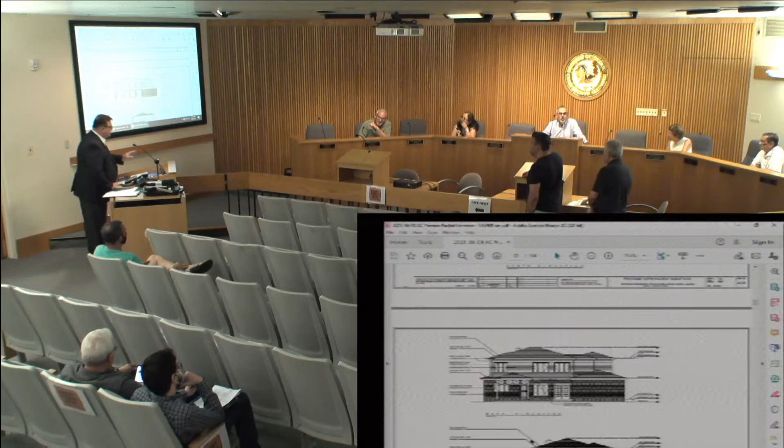Joe, do you have thoughts on those? Is your mic on? I do, but I was talking away from the mic, so I'm sorry. Okay, thoughts on the commissioner's comment?

I mean, it's valid. These look a little bit more complementary of the elevation. The two windows you see on the right are from the master bedroom. The one on the left is from the master bath, which has a bathtub next to it. That's why they're bigger, and the room is bigger. The room is about 17 by 19. So we went with the code just to satisfy light and ventilation requirements.

So you're saying based on the size of the rooms, a larger window might overwhelm it? Yes. Okay. Joe, are you good with that response? Why don't you make a motion? Thanks, Joe.

As the new guy, I have to make a motion. I will make a motion to... you know, I'd rather not. I'm gonna hold on. That's fine. Does anyone else want to make a motion?

Jay, you had some comments, why don't you move? I don't have any comment on that, but I can make the motion. Please do.

I'll make a motion that a certificate of appropriateness be granted for case number 2021-033A, 8018 Lauren, as presented. Anyone second? I'll second. All in favor? Aye. Any opposed? No opposed. So passed. Thank you very much. Good luck. Thank you.

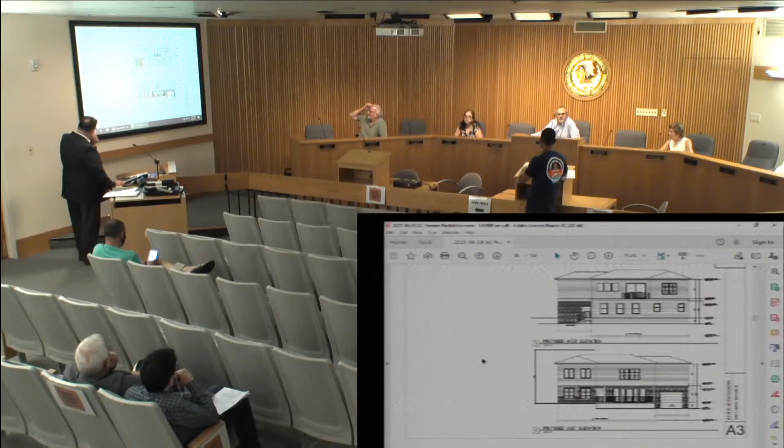And the brick? The brick is gonna stay as is, it's yellow, just as the home is now. And the roof is? The roof is currently asphalt. And it's going to be a standing seam? Yes, standing seam roof. Do you have existing pictures? I've submitted them. I saw them online, actually.

Is there more? Okay, this... This is the rear? Yes. And that's the side. All right, so the yellowish brick with a gray Hardie plank above and a light blue standing seam roof atop that. All right, it's a neighbor. This is my neighbor's house, yes.

Across the street neighbors, they don't... all right. Well, I think we've resolved that, that works for me. Any other comments?

Mary Jane, it doesn't seem to me like the windows—if you could show the front facade of the house, the proposed... the windows, I don't understand why they're different. Upstairs, on the left side, they're not divided like the ones below. Yeah, that's just a design.

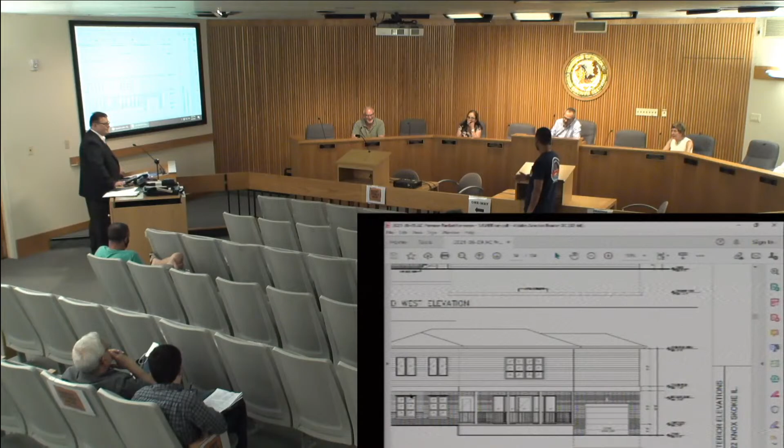Moving on, case number 2021-036A, 8118 Knox. The staff has no objections with the design. However, it is recommended that additional brick be provided to ensure 51% masonry coverage, and the new windows on the east elevation match the size of the existing windows. Technical items to be addressed include ensuring all building code requirements are met between the addition and the detached garage, and the installation of a sprinkler system. Also, a pin consolidation is required. I understand there are some comments as well from concerned neighbors for this case.

Is that true? It's the Davis one that I mentioned. Never mind, I misspoke. What name? I'm just kidding. Go right ahead, sorry.

Our architect has said that we're actually at 55% masonry, according to his notes, because we asked him after we saw the staff recommendation. The other thing is, our house was built in 1939, so finding brick to match is gonna be costly and probably impossible. We do have the siding, which is a very good match to our brick - I have a sample of that. Do I pass that here? You could just hold it up. Got it, looks good.

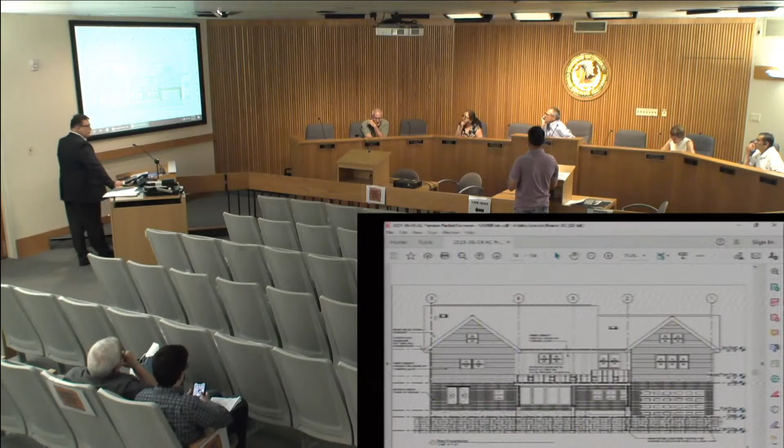My garage is set 13 feet back right now. I'm gonna bring it up to the sight line with the rest of the houses. Bringing that up, what it'll do is - you can see in between what would be the north side of the house and the south side of the house - we're gonna create a covered patio with a steel roof, kind of like an accent roof. So it'll be a black steel roof. The roof on the house itself will be a black asphalt roof.

I brought samples of what we're planning on using. It's gonna be a Trex deck and white wrapped column posts.

As far as the windows on this elevation, I have a mess up, I guess. I didn't notice that my architect didn't put it in, but the 2 windows on the north side of the house we're currently looking at are going to be the same size as the 3 windows on the south side. It won't be perfectly balanced, but that room's a little narrower.

And then on top, I agree we should do 1 and 1. The 1 window on the north side is gonna be just a window in the attic. On the south side will be a single unit with vaulted ceilings - that's where my master bedroom will be, kind of in between the two.

So if we go from south to north, the 2 larger windows are our master bath, and the next 2 preceding windows will be a 2nd-story laundry. The size of the big windows is 32 by 54, and I'm trying to keep the smaller ones symmetrical with whatever is built into the brick of our house currently, which is a 36 by 38 window.

So basically on any of the other elevations you look at, on the first story, all the windows match the same as what's currently there. I'm sorry, Carl, is it?

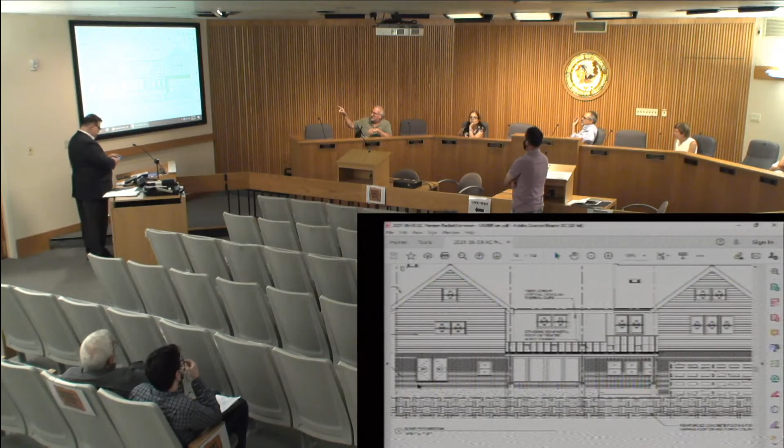You had mentioned something about the gable windows - those were gonna change a little bit, because your master bedroom has a vaulted ceiling. They were only gonna be singles, a single and a single. So instead of two above the three, they'll have one there and then one on the other side. Correct, okay.

And then the other thing we're tossing around is, from peak to peak, you know how they put that trim board, and then putting a different, like a shingled kind of look, James Hardie look. So you'll have the vertical, and then you'll have like an accent. I have a brochure if you want. Please - is that in the packet? No.

There's been no public comment on any of these items so far.

Thank you. So see how - I don't know if you want to pass this around - see how they go vertical, and then it looks kind of like roofing, I guess, it's just decoration. It's to break up, so not everything is symmetrically flat.

Yeah, I like the way you used the vertical board and batten in the center, or vertical siding in the center. So it'll be nice, like three things - you have the vertical, the board and batten, and then the new thing nowadays is it looks kind of like roofing, but it's not roofing. If you look where the single window is, right there, if you look into it, it's not actually just vertical siding - it has a slight accent of something different. I believe you, so it's got a texture.

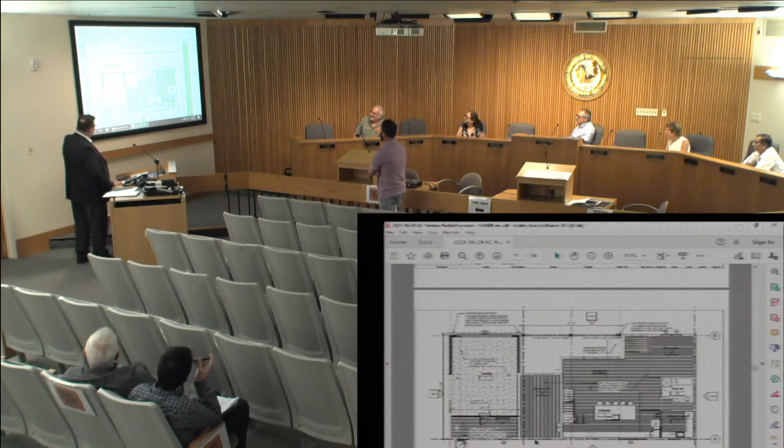I'm going to get up. Right here, so you can get this up. Because I'm assuming you've got a small patch of grass between your house and the alley on that side. Is that where, or am I wrong? Actually, it's not giant, but yeah.

Yeah, I mean, and it's just again, I don't want to start an argument or anything like that. This was just a comment, something for you to consider and think about.

We actually have, from the north side of the house, the east end of the house, a paved walk, and there's an air conditioning unit. I barbecue in my little patch and I wish I had a door to the back. Okay, gotcha, that's all I'm saying, just keep an eye on it.

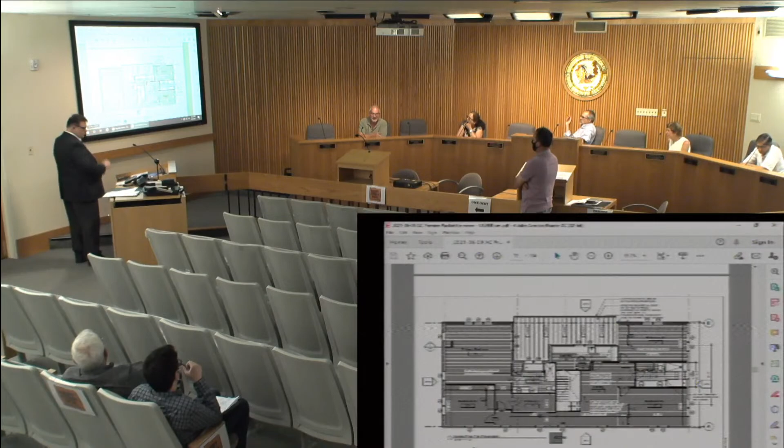You said you've got kids, it's probably a good idea to have a spot on the side to get to the backyard. Because when you barbecue in that little space, if there's not a lot of air, I have to be careful of my neighbors. So just a heads up. I got cool neighbors, Terry O'Lean is my neighbor, I'm sure.

All right, well, whether we can give you an option for the door, in the motion. Does anybody feel up to it? All right, good, because I want to do it. I move that, no comments, right?

I move that a certificate of appropriateness be granted in case number 2021-036A at 8225, along with the following provisions: Matt, if you could go to the elevations for me please, the other way. The front, that's good. That the north windows of the west elevation, on the left, on the second floor, be increased in size to be consistent with the 3 windows on the south side of the west elevation, and that only 1 attic window per gable be used instead of two, thus eliminating 1 on the south side of the west elevation. That's it on that elevation.

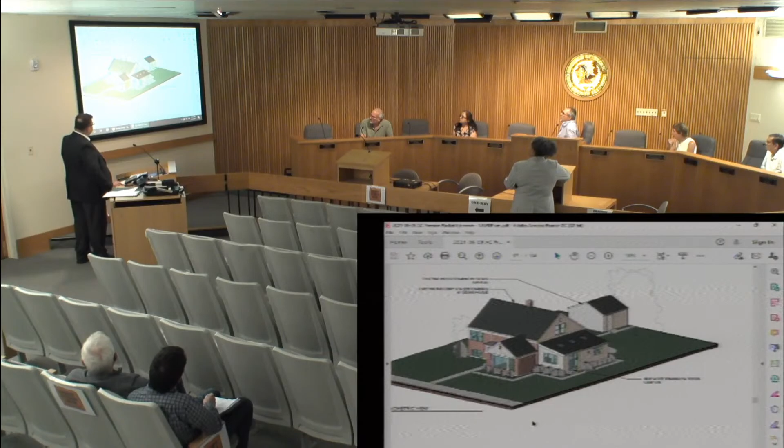I understand the comments of the staff. I'm opposed to the shed roof. You have a house and a garage and a porch in the front - I don't know if that's the garage or anything - they're all gabled, and now the addition looks to me like an addition, not picking up the architectural features of the existing house. I understand the need for more space and how challenging that can be, but go back to that elevation right there, stop.

That kind of is screaming at me that the slope of the shed is not consistent with the slope of that gable in the front, and it's not pleasing to me. I don't know if that can be redesigned to meet your space needs, but to me it looks like it's just been slapped on the side of the building.

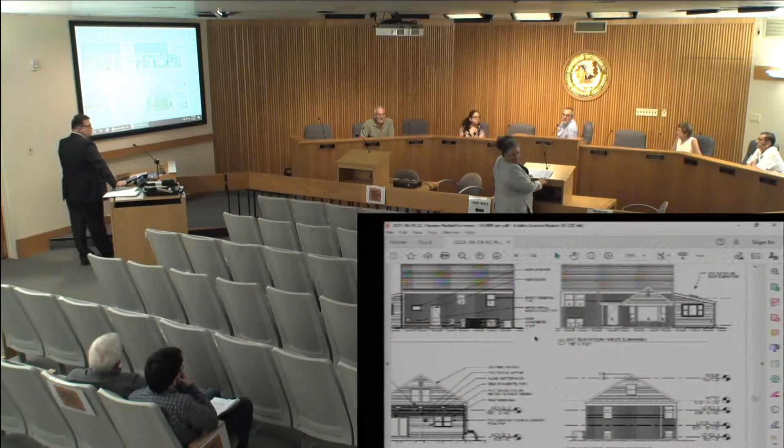So this is our friend the architect, Chris, who is working on the project with us. Hi. For the record, my name is Chris. My husband and I are the architects of the project.

Several months ago, when we started the project, we did several roof-type studies for the addition. Understanding that the program was specific for the first floor, we did explore alternate ways of doing a roof other than shed, that would not impact the second floor, including that window up above. So I can share with you some of these renderings if you'd like to see what we were looking at in terms of a gable structure.

Well, before you do that, would you be willing to move in that direction? Well, I may not want to present them if you're not. I mean, it's not our preference. That's not what we want to do. But if it means that we have to do that, or nothing, we're open to it. But that's not what we budgeted for.

It's not our preference, so, but if it's a requirement... Well, we're not here to require anything. We're here to look at the appearance. These are our comments. There will be a vote, as you've seen all night long. If the vote fails, then you'll have to redesign anyway. I don't know if you're gauging the temperature of the commission right now on the submission. You've heard my comments, and that's about it.

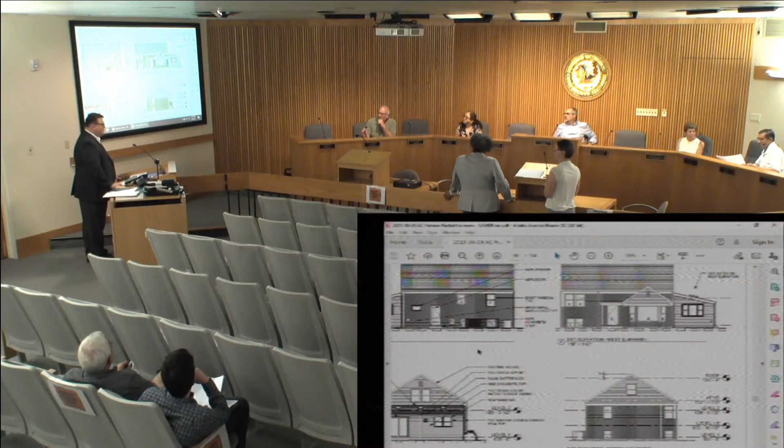I had training for about 15 minutes 18 months ago on how to do this, and then COVID hit. Right, exactly.

In the interest of, as this is going around, I do have a couple of comments as well, and I agree with the comments of staff and fellow commissioners. There's a couple of things going on that may be able to be resolved. One is that it's hard to see that the addition is recessed a little bit. There may be a way of, the roof line, I think, is what everyone's really kind of focused on, because it doesn't follow the roof line of the gable of your living room and the gable of the house. They're all proportionate. There may be a way you can take a look at it by maybe creating an outdoor space in the front, and then maybe a pergola or something that comes across that creates a flat line, so that when you pass the house and you're looking at it, you're not looking at that kind of shed addition.

The point is to make it not look like an addition, or if it is an addition, make it really stand out, like do a Nichiha panel or something, make it red, go crazy with it. You would vote for that? I would, but if you're gonna go different like that, sure, and that's expensive, but if you're gonna go that different, sometimes it's better to just go different instead of trying to make it look like an addition.

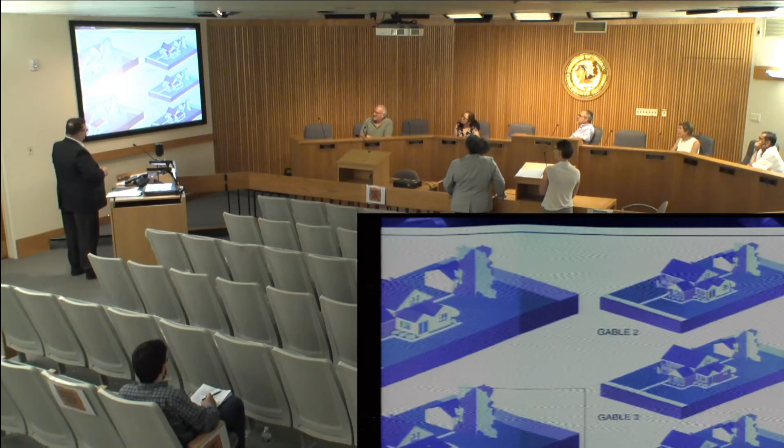So the one on the bottom left, which is not fully on screen right now, is the one that we have presented to you. And then up above it would be with siding on the outside and the double gable.

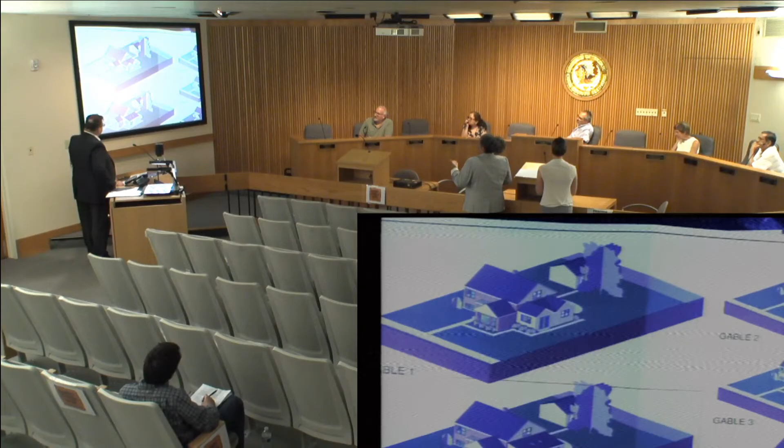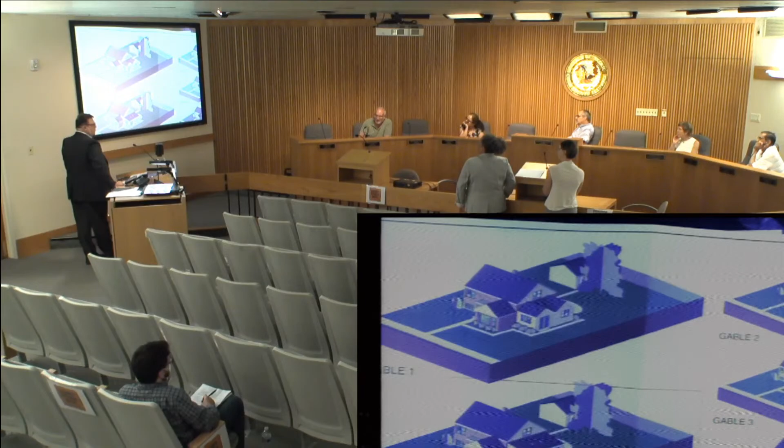I think the part that bothered all of us were those two peaks that poke up above the transition line, matching the shed pitch roof. We just preferred not having those two little bits—it just didn't sit right. Is there a solution to that, Joe?

Well, somebody mentioned earlier, did you consider a flat roof? You might be able to go with a second floor deck eventually, like a phase 2 in 10 years.

I see what you're doing with this shed roof, meeting that transition line and coming down, probably creating a little bit of vault space in the kitchen, which is nice. But you could also go a little higher with a flat roof and get that vault space, keep the window facing south in the master bedroom, and then for phase 2, when you want to retire in Skokie in 20 years and stay put, you can always have a way of expanding further.

So, it's something to consider, because I think that would resolve the odd angle of that shed roof, and it's not adding a big expense—plus you're not adding all of the extra gables and little peaks going above that transition line. I think it would resolve the issue that we have.

And maybe you can use the flat roof if—I don't know what the function of the second floor is there. It's the primary bedroom. You can open it up and have like a rooftop. Yeah, that's what Joe was suggesting.

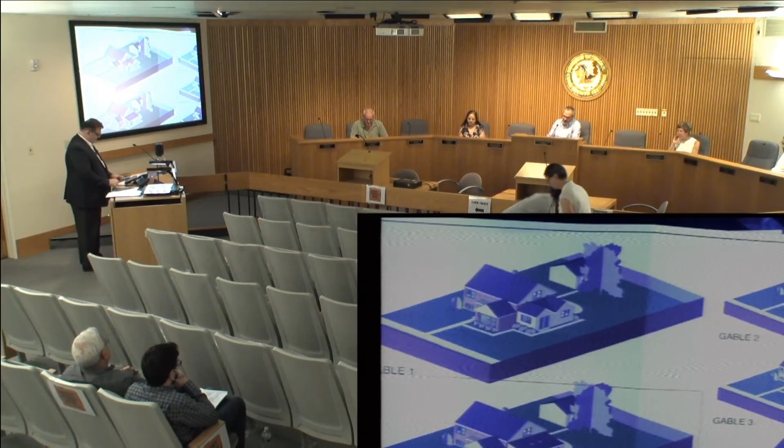Okay, moving on. The next case is case number 2021-037A at 8253 Kimball for Howard Dardick, an industrial first floor addition.

Hello there, how you doing? Good, good. Might want to just give us a minute. Oh, and the comments are: staff has no objections with the design. Technical items include a zoning board of appeals approval on Wednesday, July 7th. Correct. Okay.

This is your property? Yeah, it's at 9 feet to the back of the property approximately, which will line up with the building to the north that we also own. We own the buildings on either side of it. It'll line up on the north, and halfway more on the south, because both of those buildings come out further than this particular building. They'll have a larger garage door at the front. If you look at it, the far building is approximately where we want to come out to. We'll have a larger garage door, which will make it easier to get in and out, and that's basically what we're doing—we're adding 9 feet.

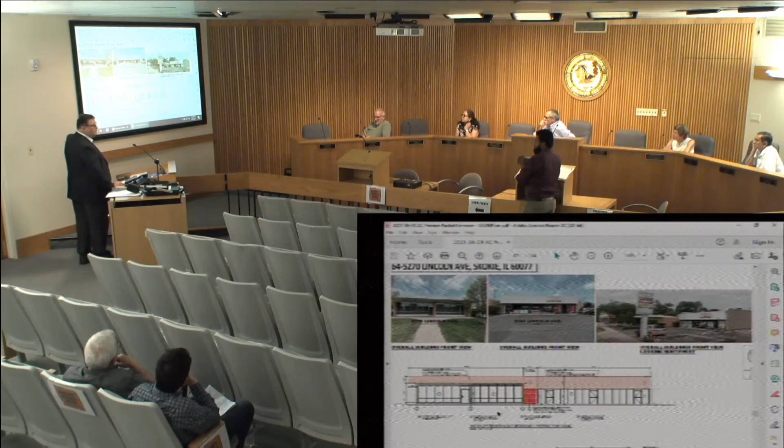So I'll make the main entrance from the new building, and customers could go inside to the next building through that corridor. So there's going to be an entrance somewhere. Yeah, over there, this will be the entrance, and we'll close all the other entrances.

Looking at the demand of the neighborhood, and for the convenience, we just thought of buying it out.

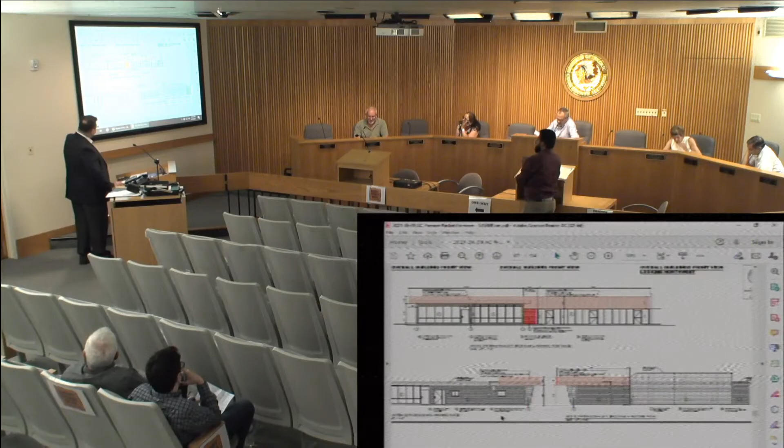All right, so they're suggesting we keep that as is, to complement the rest of the features and be complementary of the fascia, as opposed to covering it up. Well, wait, all right.

They don't line up. The 5270 is forward of 5264. So it's gonna be connecting somewhere in the middle over there. Yeah, it'll connect right there.

And what will that material be? It's mentioned. What is that orange stuff? Yeah, that's the bricks.

So you're introducing brick, and is there any brick right now? Right now, from the east side, we'll match up the same color bricks of 5270. It's gonna be a little yellow. So there is some brickwork there, and you're gonna try to match that? Yes, exactly, from this side.

Maybe that's the wrong way. I think that's the only plan, the one you had up in the packet. Yeah, that one, that's it. This is it. So that's the corridor.

Okay, so where is that brick introduced? Is it behind the elevation of 5264? Yeah, over there where the curtain will be. But you said there's a corridor there. Is that only open from the back?

It connects the buildings. These are separate buildings, and this will be a connection here. Okay, so it'll be a pass-through. The brick will be at the same plane as the front elevation of 5264, right there. Yes, correct, which I understood.

The wall, okay, I understood that. So both proposed buildings are not in the same line. One is a little forward, maybe 20, 30 feet difference between them.

At least 30 feet, yes. I kind of like the staff's comments about leaving the 5270 facade alone, and the facade of 5264, if you want to upgrade that, is fine, but they are two separate buildings, and even after you connect them, they'll look like two separate buildings. And I think architecturally, 5270 has more interest. By putting that facade up, you're going to remove the interest, in my view.

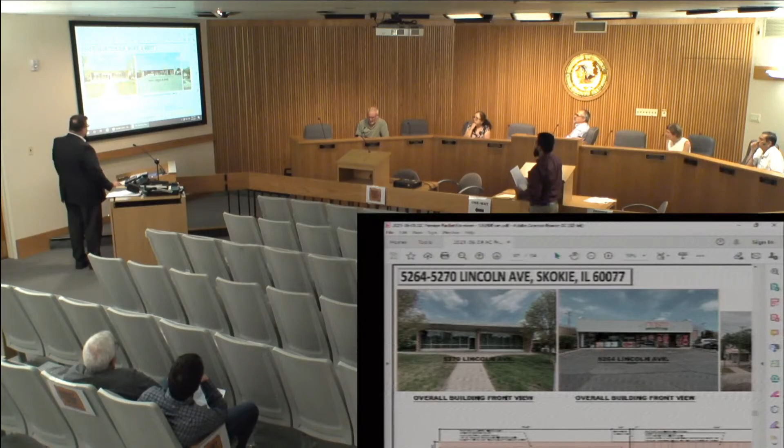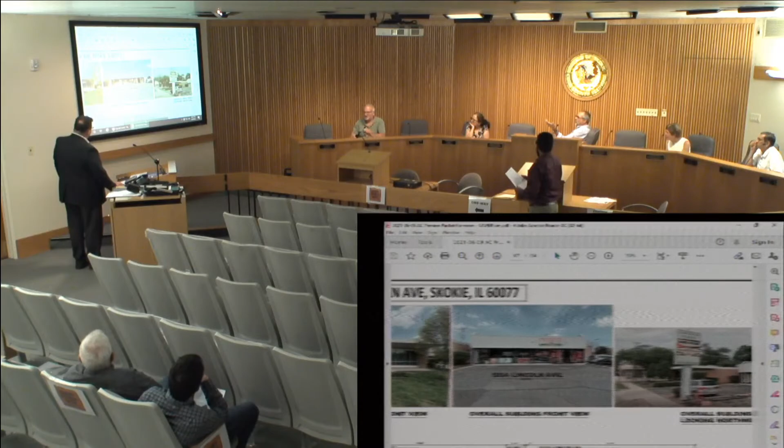Arshana, what do you think about that? Yeah, I agree, unless they work on the elevation and the sign to match, to complement the signage of 5270. But what you're trying to do is replicate 5264 in some fashion, when it might be wiser to try to replicate 5270.

Or we can get that from the facade from 5264 and just stop it here by 5270? Yes, and just leave it as is. Yeah, you just saved money. Yes, thank you, you're welcome.

You have a big opportunity here - 5270 is a unique building, and this is an important entrance to Skokie. You come down, it's on a curve, and you see all of this, there's stop signs everywhere, and there's a lot going on. You have a real opportunity to create a separation between these two buildings, even though it's one use.

By this breezeway or whatever it is you're adding, that could be the separation - you're actually talking about brick, but on 5270 that's all limestone on the front, on those wings that stick out. And maybe that space in between is something distinct that ties the two together, even though it's different. So you don't have to try to match anything - it could be something fantastic.

Fancy something, okay, perfect. And that way you don't have to add a lot of bushes in the front. Well, it should be architecture, not bushes - bushes get run over.

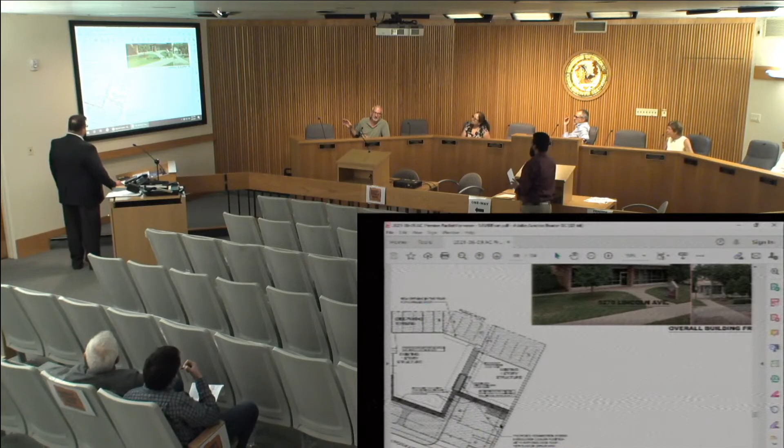So, that infill there - sorry to interrupt, Joe. You might consider, what is the facade material, by the way? Is it a metal soffit? Yeah, that's metal. Is that new, or are you keeping the existing? Right there where the cursor is? Yeah, we'll keep the existing as well.

Maybe instead of brick there, at the connection, you make it metal panel. And bring the facade down, bring the awning down. That'll give it continuity for that building.

And you're not even touching 5270. If you were to add a color, like the red or the green from your sign, you could really create something interesting and distinctive. That should be good.

So what is your plan for that metal paneling on 5264? Are you going to paint it, put a coat of paint on it? No, not right now? For where you have the sign, Badri Foods - are you going to paint it, or are we just going to make the connection? We'll just make the connection right now. Okay, all right, fine.

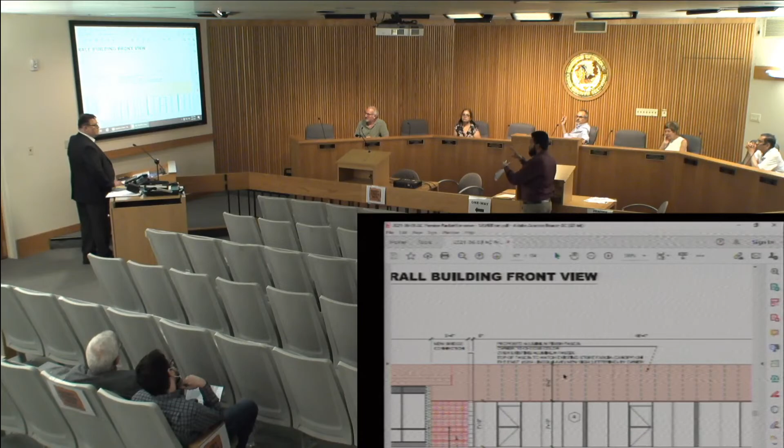To be clear, the proposal was to replace all of this - this would all be new fascia. Maybe he was trying to put a new material instead of taking the existing one out, maybe just putting some material on top of it. So this was the proposal, and from what I hear you saying, and from the commission, is to just keep it the same?

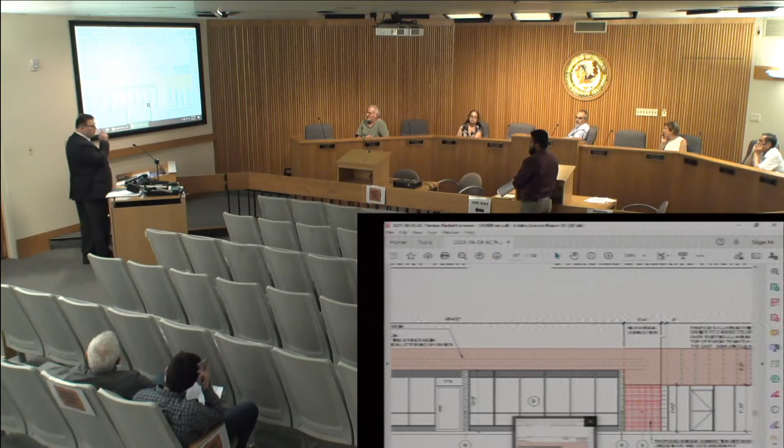Well, if it's going to be new, great - I think it'll look better. But you can incorporate whatever the new material is going to be into the opening. Okay, so leave this building alone, right?

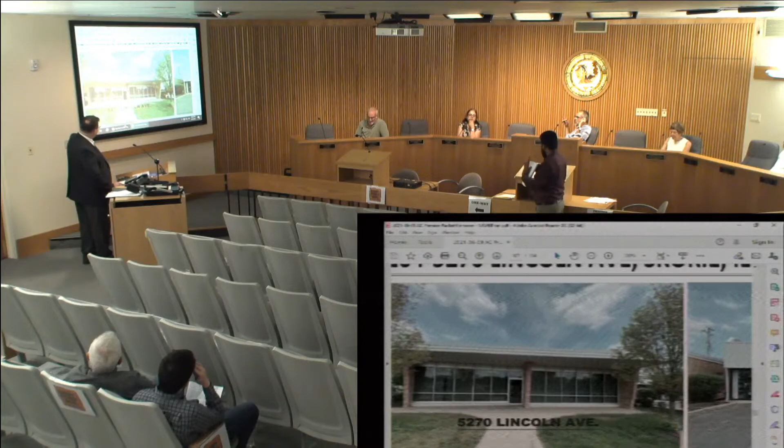And how about the east side of this building? The east side of 5270 - can I extend that facade? The 30 feet coming out of the east side - that would be probably the 5270, right? Yeah, the east side, the existing 30 feet coming out. So can I turn the facade? Sure, yeah, you're gonna turn it down to the corridor, right? Yes, by the corner.

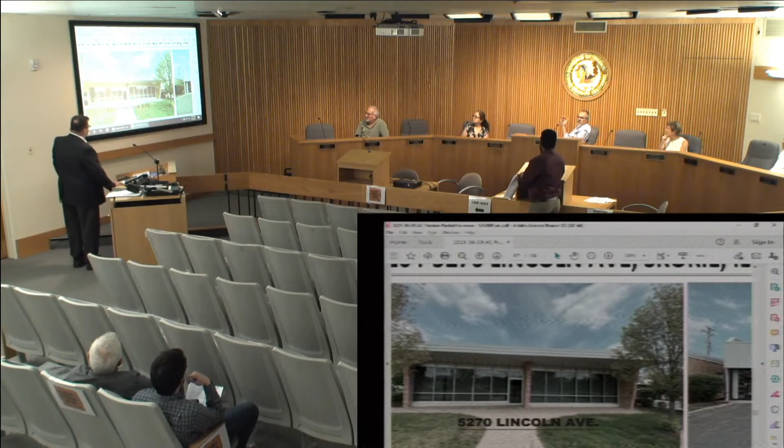What's there now - just brick and a parapet? Yeah, the same material, same thing, we'll just stretch it. If you want to wrap the fascia around, go for it - a return or all the way on that elevation?

Are you talking about this corridor side, 5270 side? Yeah, the corridor side. The big overhang is just on the Lincoln side. Gotcha. So the proposal would be then to extend that big overhang to the east so that there's a covered walkway. Yes. Okay.

Any comments, staff? Sounds okay? Okay, Arshana, do you think you can handle that one? Joe, what do you think? All right, and then I have a question after we're done with this - I have a question about how the process works.

Okay, I make a motion that a certificate of appropriateness be granted for case number 2021-041A, with comments, keeping the 5270 elevation as is, creating the connection with the same material used on the front overhang of 5264, being a new material, and adding - we talked about color but then we didn't - something unique to that breezeway, just to that area.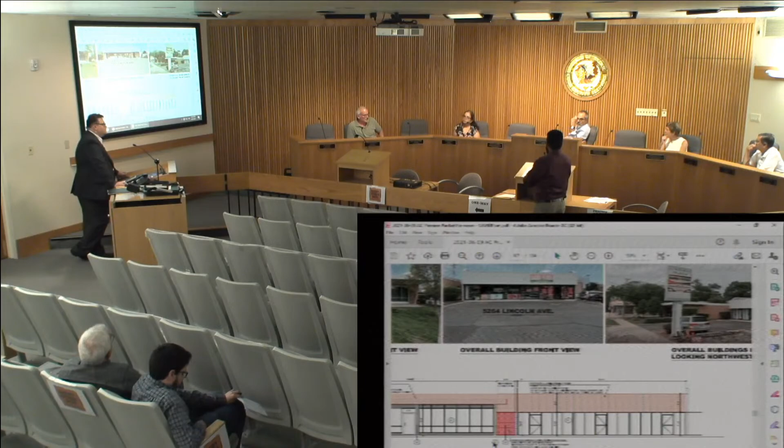Second? All in favor? Aye. Any opposed? No opposed? So passed.

Thank you, sir. Okay, thank you.

Thank you. My question for the committee, while I'm still thinking about it - is it appropriate? We have one more case, can it sit, or is it about what triggers review? There's the elevation on the east side that's not being touched. It has no windows, it's just not real nice, and the sign is old. Is that a plan commission item, or is that something else? What triggers appearance review, and where does it end?

We'll take that in executive session. Okay, how's that, that would be good. All right. How did I do, Matt? Is that all right? That works. Okay, you can give me a call if you'd like. Okay, I don't have a card on me, but I'll get you one. I know where to find you. Okay, that works.

Okay, we have two more cases. The next one is 2021-042A at 3330 Dempster for MNCDK LLC, 3320.

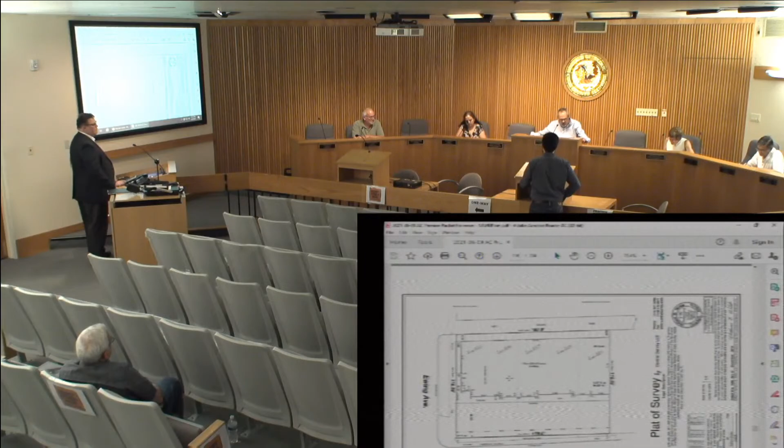Jeremy Kriska? Good evening, how are you? Good evening, I'm good. Great.

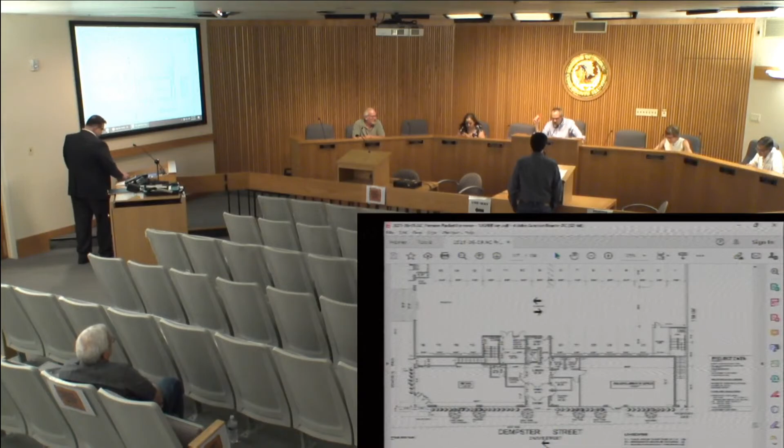Staff has no objections with the design. However, it is recommended that the street trees be located within a parkway along Dempster, with the sidewalk adjacent to the building. Technical items to be addressed include meeting the sight distance triangle requirements of the village code and addressing all items from the March 21 preliminary plan review, including site plan approval, zoning map amendment, etc., processed through the Plan Commission and Village Board. Also, a PIN consolidation or simple subdivision will be necessary.

All right, what do you got? Good evening, Chairman and Commissioners. As residents of Skokie, I'm sure you're aware of the vacant shopping center on the corner of Dempster and Ewing. As of December, that's been demolished and it's now just a vacant lot. We'd like to propose a development of a mixed-use building, which will have 2 commercial spaces on the ground floor and 23 apartments above.

We've included 3D renderings - those are the last 4 pictures of our packet. The ground floor facing Dempster will have the two commercial spaces and then 25 spots for vehicles, plus 15 additional spaces in the alley. What is the building? It's mixed use with 2 commercial spaces and 23 apartments above. Okay, thank you.

The alley spaces will be for the commercial spots and additional spaces for people in the apartments. The ground floor is going to have a 7.5-foot setback with a plaza along the Ewing Avenue side and a 3-foot setback for landscaping along Dempster. The Dempster side is going to have 4 stories, while behind it there will be only 3 stories with a deck on the roof.

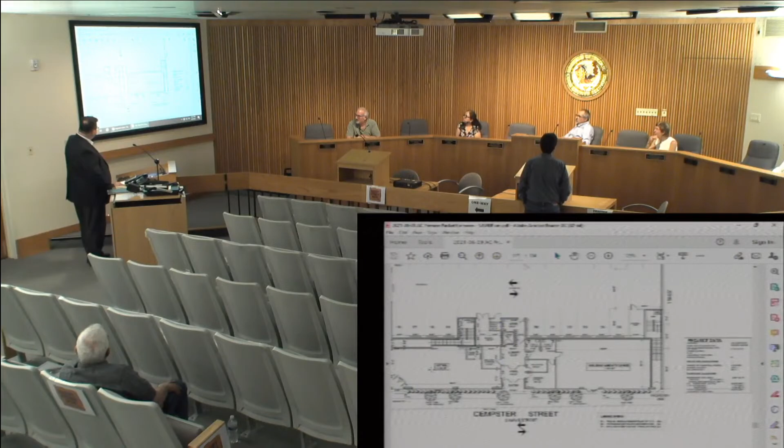Thank you. All right, well, I'm in favor of supporting the village's comments on this one. Sounds like, Mary Jane, you are as well. Yes, okay? So, any other comments?

Well certainly, jump on it. Going back to the rendering, I really like this project. I think it's great, I think it's a great use for the site. I'm really excited to see that you're interested in doing something like this in our community. It is a prominent location, given that the bank is kind of set back a little bit, and there's some space between. I bank there, so I sit there and I was wondering what you guys were doing, and looking at that corner, and then looking at the facade, there's a lot of exposure on the south, just the south face that faces Dempster.

Looking at this, I like the design, I think it's appropriate, but had you considered, or would you consider, aluminum or some type of metal sunshades over the windows, on one of the floors, just to add a little bit more depth to the elevation, and it might even improve the livability of some of those units. If you did it on the middle floor, the third floor, just the sunshades there might give the building a little bit more pizzazz. We haven't discussed anything like that at the moment, but I'm sure it's something we'd be definitely willing to consider.

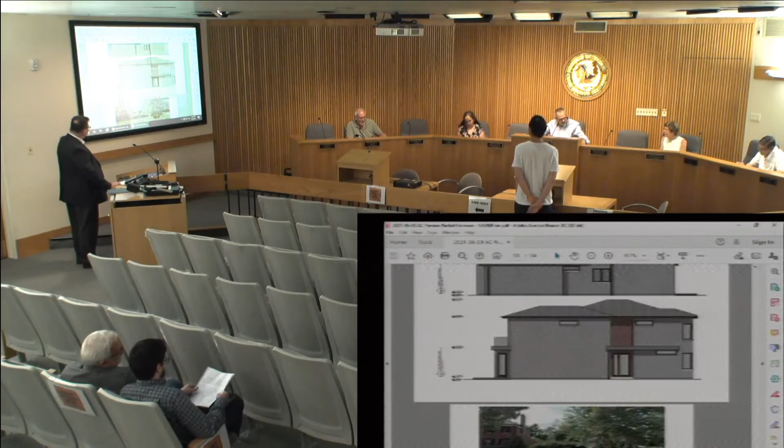Okay, which brings us to our last case, 2021-025A at 7852 Kildare for Edward Janusz, residential new construction. Oh, yes, welcome. I'm the architect, Edward Livano. Good to see you again.

Yeah, you too. So you were tasked with meeting with your neighbors and perhaps presenting a compromise design. Right, yep. And is this the result of your compromise? Yeah, I hope so. We basically changed the flat roof to a pitched roof, 4:12 hip roof. Nothing else has changed apart from that.

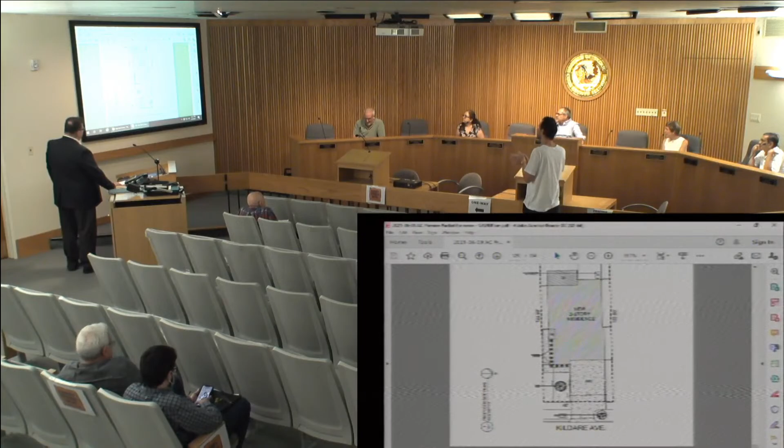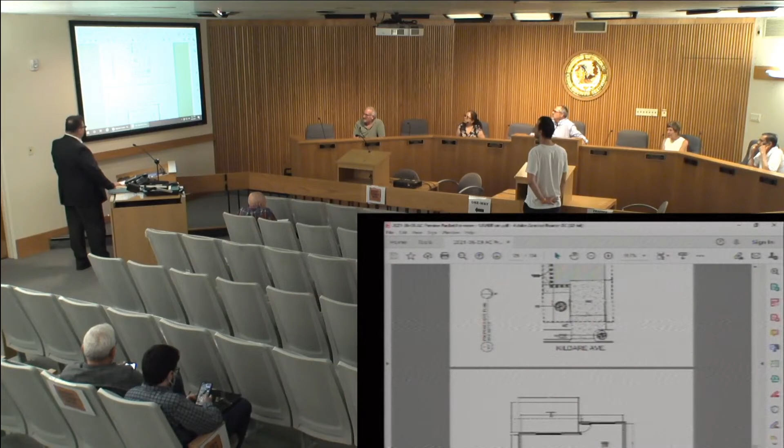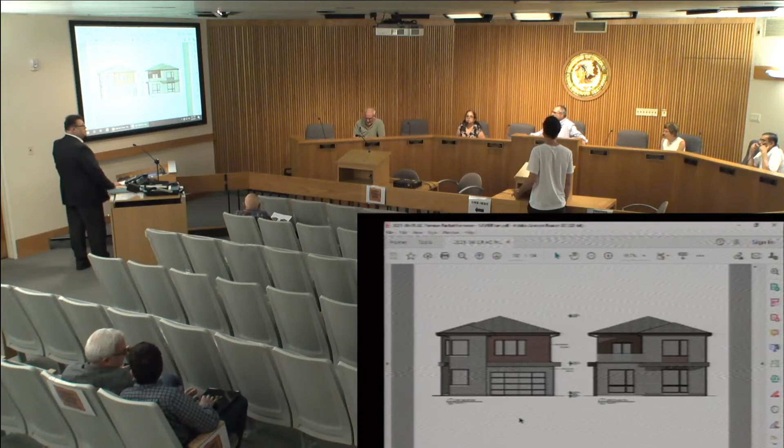Oh, actually, the driveway, we also changed that. We narrowed it a bit where it's closest to the street, in order to preserve that parkway tree, but then it expands to the full width of the garage. So these are the two main changes we made. And the roof has increased in height now. It was, I think, 24 feet. Now it's 27 because of the pitch. But it's still below 28.

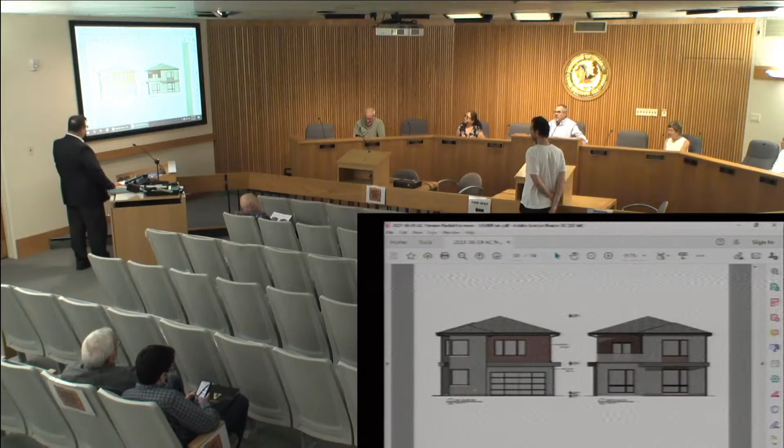Comment? Members of the commission, my name is Dave Baum. I have the home adjacent to this proposal at 7848 Kildare. We met with the petitioner and the architect last Monday evening at the lot and talked about a number of changes, which included a change in the design of the driveway, which the owner has agreed to. As you can tell from the original plans, the shape of the house has changed dramatically from being nothing but a group of boxes to now a shaped home.

The color, as I understand it, will be gray brick. Right, Glengarry, Sioux City, Ebonite. I do have a couple of questions for the architect and the commission. Are you using aluminum siding or engineered plastic siding? It's aluminum siding, but it looks like wood. It has a coating on it that makes it look like cherry wood, I think. So it is aluminum siding? Yeah.

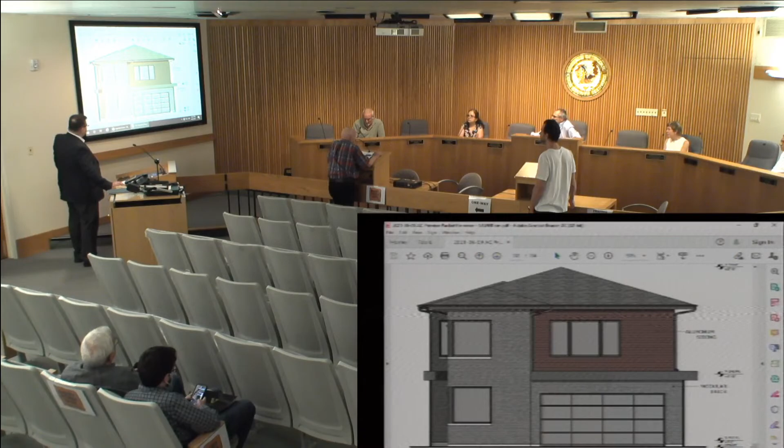Okay, we wanted to have you explain the drainage in the backyard. Is there going to be a catch basin, or is that the province of the commission? It really is not. However, those issues are addressed and evaluated by the engineering staff. You can bring them up, but where the water goes is not under our purview. Okay, but it'll be taken care of. Those were the issues I had, 3 or 4 issues the neighbors had about where the water goes, since there's no crawl space and there's a concrete slab. Those will be addressed. Hopefully to everyone's satisfaction, and with the proper science.

Any other comments? Okay, well, I want to thank you, petitioner, for your compromise on this. I want to thank Mr. Baum and all of your neighbors for also compromising on this case. And thank you for giving us the opportunity through a couple of extensions to help make some helpful changes to the block. Well, that's great. You're welcome. And I hope you find it to be a good addition. Thank you.

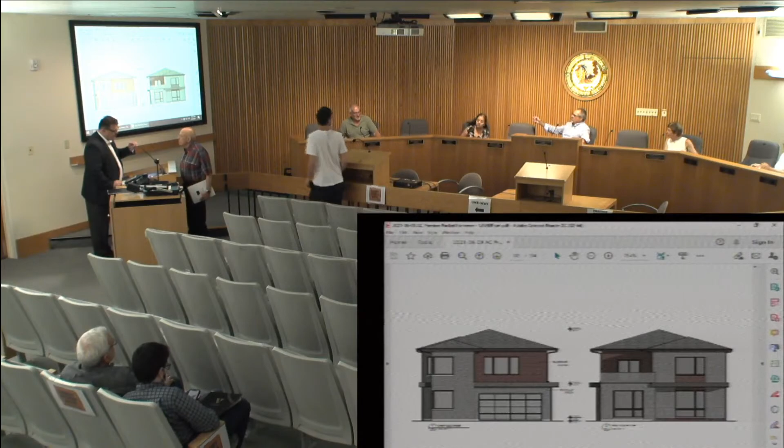One question. Yeah, we've already approved. Sure. So let's adjourn the meeting first, Joe, okay? Thank you. I think everybody is done. Thank you, you could wait for the answer. We're adjourned.